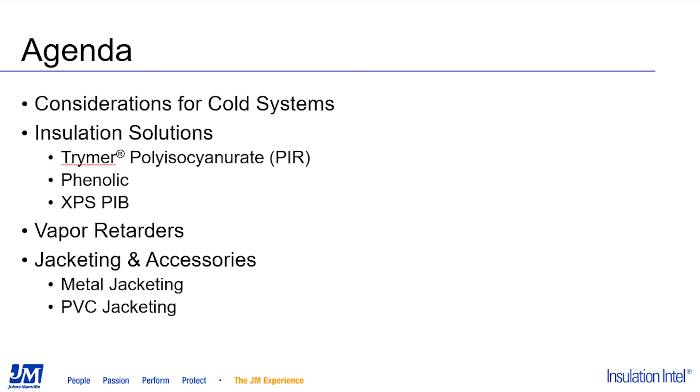Just as one example, XPS pipe insulation billet, widely known as Styrofoam, is mostly used in the application called refrigeration, which tends to be food and beverage manufacture and storage.

There are many factors which must be considered when designing a cold insulation system, and some of the key ones are shown here. There is way too much in this topic to cover in any detail today. We have presentations on this subject alone, and if this would be of interest to you, let us know and we can arrange such a presentation perhaps for your company.

The first of the design considerations we'll talk about is: what is the service temperature of the pipe or tank? Is it 40° Fahrenheit chilled water, or is it minus 320°F liquid nitrogen? The system design needs, materials, and system complexity are very different depending on this temperature.

What are the climatic conditions? That's the next consideration. Is it indoors in an air-conditioned space, which is probably the least challenging environment? Is it outdoors in a non-conditioned space, which might be a medium challenging environment? Indoors in a non-conditioned space. Is it outdoors in a humid environment, which might be the harshest or most challenging environment? Is it buried below ground? Each of these and other climatic conditions will drive different insulation system design.

The water resistance of all cold insulation systems is probably the single most important issue to consider. Using closed-cell insulations with high-quality continuous vapor retarders and jacketing that naturally sheds liquid water are among the key critical design aspects that must be considered.

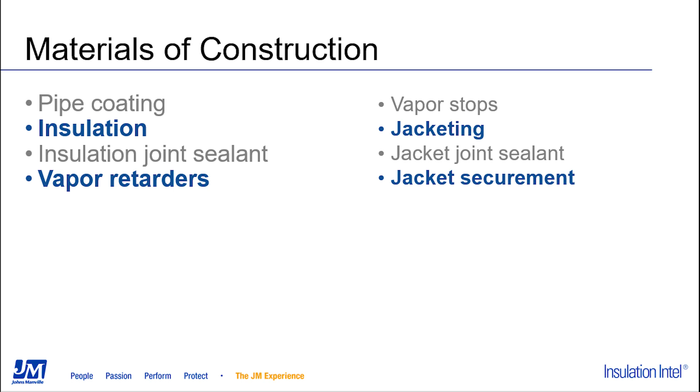Johns Manville offers materials in the 4 categories highlighted in blue here, and we will discuss each of these in more detail later in this presentation. Okay, sorry, I think we jumped here.

One of the most important aspects of cold insulation system design is the decision by the specifier on where to operate on what I call the cost-performance continuum. In general, higher insulation system cost yields better long-term performance. Conversely, a lower cost insulation system yields lower long-term performance.

However, there is no single point on this continuum that is optimum. This point differs for each specifier depending on which factors are more or less important to them.

Usually, higher performance means more redundancy in the insulation system and more backup components. An example of this redundancy would be closed-cell insulation used with a low permeance continuous vapor retarder and periodic vapor stops in the insulation system.

Redundancy also will help provide the facility owner time to recognize and find a problem with the insulation system prior to irreparable system damage. System damage is often caused by water entry. If the surface temperature is cold enough, this can form ice within the insulation system. Water or ice will hurt the insulating ability of the system and can cause physical damage, as well as possibly corrosion of the underlying pipe or tank in some cases.

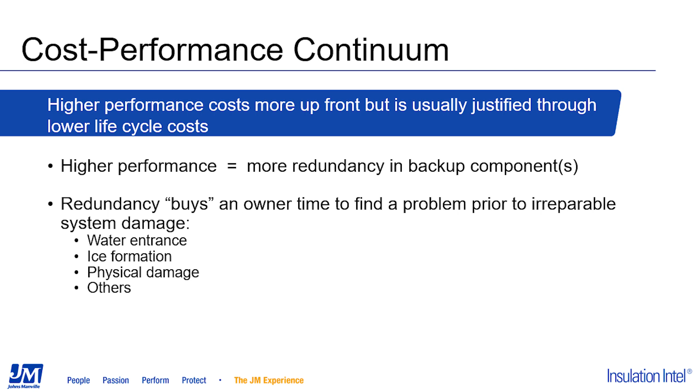Hopefully, if problems are found early, they can be repaired without having to replace the entire insulation system. This is enough discussion of design considerations for now. As you can see, it's a very complicated topic, which JM would be happy to cover with your companies separately.

A really important question to ask ourselves is, why is mechanical insulation important in cold applications? The answer is simply money.

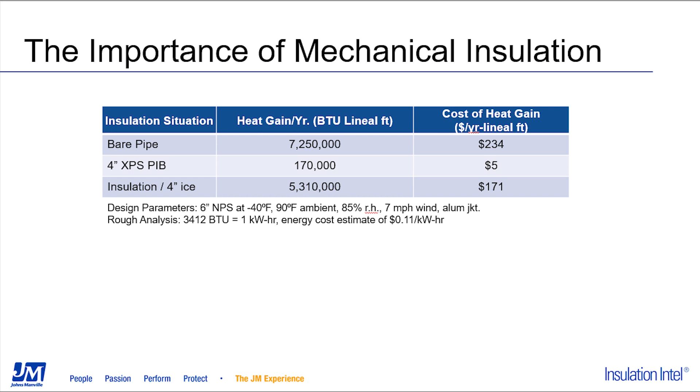As an example of this, consider the hypothetical example I've shown here. I show the cost of energy associated with a single lineal foot of pipe. Remember, this is one lineal foot of pipe for 3 different situations. These situations are bare pipe, a well-insulated pipe using our XPS pipe insulation billet insulation, and a failed insulation system.

You can see the design parameters that we have here. They're reasonable ones, and the rough analysis variables that we've chosen to use here. Again, they're all very reasonable.

The cost savings for a single lineal foot of pipe achieved by insulating a bare pipe is $229 per year, the difference between $234 for bare pipe and $5 for a well-insulated system. This is way more than the cost of an installed insulation system, and the payback for insulating this bare pipe would be just a few months at most.

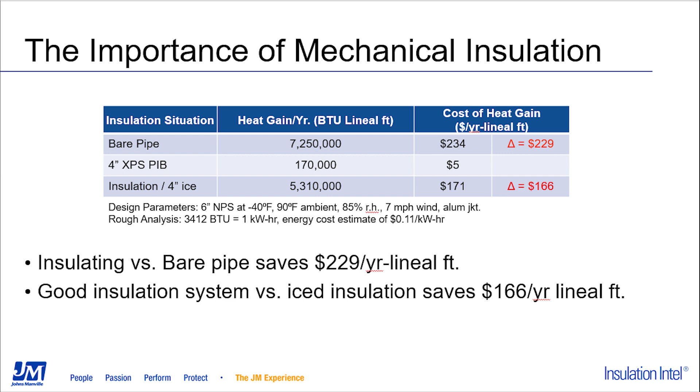Next, look at the failed insulation system, which would have an energy cost from heat gain of about $171 per year for this single lineal foot. The cost savings from a failed versus good insulation system is $166 per foot. This would also have a quick, less than 1 year payback time. Insulation is valuable and it pays for itself quickly.

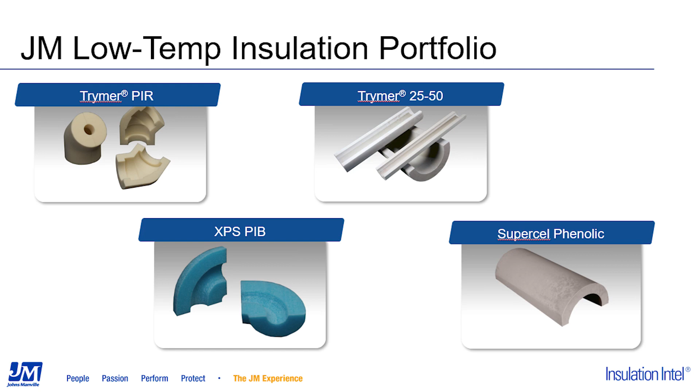The JM insulation materials that we will discuss today are Trymer PIR, Trymer 25-50 PIR, which is a special subset of our Trymer PIR insulation line, our extruded polystyrene pipe insulation billet, and our Supercel Phenolic.

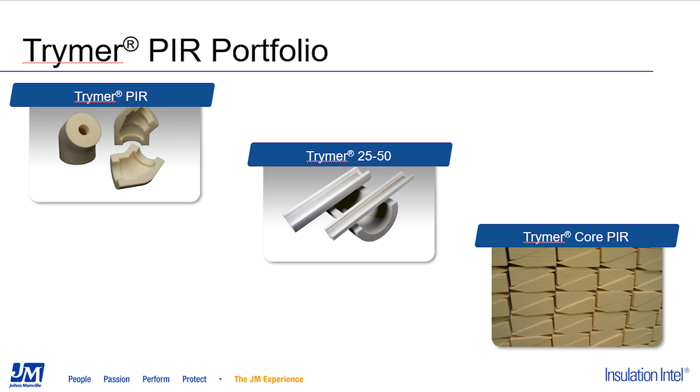The first JM cold insulation material we'll discuss is polyisocyanurate, which is such a mouthful that the industry commonly calls this PIR. The JM brand of PIR insulation is known as Trymer PIR. It comes in 3 categories: our standard Trymer PIR, also called our high index product line; our Trymer 25-50, which has superior fire resistance, we'll get into the details on that in a few minutes; and our Trymer PIR core foam, or low index line. Each of these will be discussed separately.

Our standard Trymer PIR, or high index product line, consists of 6 products with the same chemistry and composition. We purposefully control the density in this product line to achieve different strength materials. While it's primarily compressive strength that is of interest in the higher density products, all strength measurements, including tensile, shear, and flexural strength, will also increase with higher density. The product name indicates the density.

For example, Trymer 2000 is 2 pounds per cubic foot, Trymer 2500 is 2.5 pounds per cubic foot in density. This product line is primarily used as pipe, tank, and equipment insulation from cryogenic temperatures up to the 300 degree F maximum exposure temperature for all of this product line. With the exception of the highest density Trymer 6000 product, all of these have the same thermal conductivity performance with a very good value of 0.19 at the standard 75 degree F mean temperature.

As you can see, the compressive strength increases as the density is raised, and our highest density Trymer 6000 actually has higher compressive strength than standard cellular glass. All of these products are closed cell and water resistant, and all meet the flammability requirements to be considered Class A or Class 1 for pipe insulation in the building codes, which is an ASTM E84 flame spread smoke developed rating of less than or equal to 25 flame, less than or equal to 450 smoke. These materials can be used anywhere in industrial applications and even in those commercial building applications where a 25/50 rating is not required.

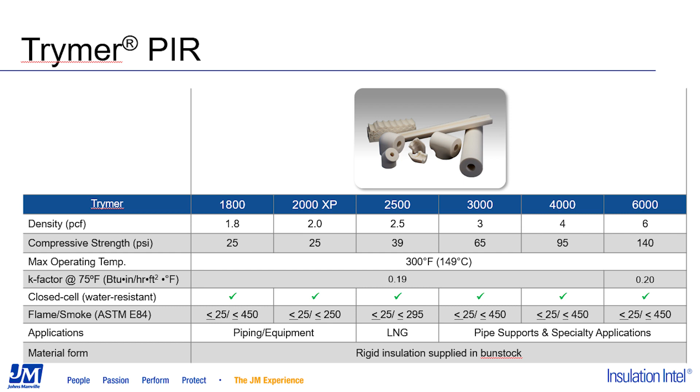Trymer 25-50 is a special product in our Trymer PIR line. It is an ideal material for use in cold and warm applications that require a flame smoke performance of less than or equal to 25/50. This includes pipe insulation in plenums, where the 25/50 or lower performance is required by codes, and in general pipe insulation used in commercial buildings, where a 25/50 performance, while not required by code, is often specified by the specifier.

Aside from this very good low flammability performance, Trymer 25-50 has the same great performance as our Trymer 2000 XP. It has an upper temperature limit of 300 F, a K factor of 0.19, and is closed cell and water resistant. The main application for this product is commercial building chilled water applications, where it provides a closed cell, water resistant insulation alternative that meets a 25/50 flame smoke rating. This 25/50 flame smoke rating for Trymer 25-50 is applicable only up to 1.5 inches of thickness, but the need for larger thicknesses than this in commercial building chilled water pipe insulation applications is very rare.

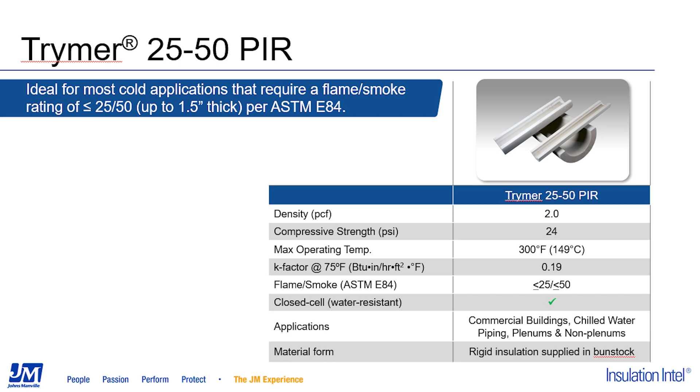The last of our Trymer PIR product lines are the core foams, or low index line. These products also come in a variety of densities and strengths, with the name still indicating the density. Each product in this line has an L at the end to indicate it's part of our low index line, so Trymer 200L, 250L, etc.

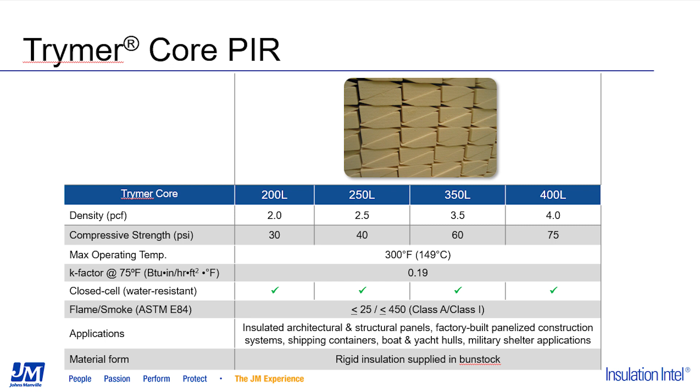All of these products have the same good low thermal conductivity of 0.19, are closed-cell and water resistant, and are supplied as large rigid buns that can be cut into whatever shapes are needed. The key application for the Trymer Core or L series products is in insulated panels, panelized construction, military shelters, and other specialty applications. This line is lower in index, which yields a material that's easier to glue strongly, adhering well to the facers, and facers are necessary for most panel applications.

Here are 3 frequently asked questions about Trymer PIR. I'll give you our answers to these.

The first: can Trymer PIR be used at temperatures below -297 F? Trymer PIR is an excellent choice for use on pipe, vessels and equipment operating at temperatures down to -460 F, absolute zero, including liquid nitrogen at -320 and other cryogenic temperatures. The JM product literature states that the lower service temperature limit for Trymer PIR is -297 F, which is the boiling point of oxygen. That's a key point: Trymer PIR pipe insulation does not have any inherent physical or thermal properties that would preclude its use below this published limit. Nothing changes in the product below -297.

This -297 limit is cited only as an attempt to caution end users that, as with all insulation types, if the service temperature will be below -297, there are important design concerns that must be considered. These center on the fact that at temperatures below -297 F, oxygen from the air can begin to condense on the cold pipe surface or in the cells of the insulation near the pipe, resulting in local regions of higher liquid oxygen concentration. Also, if the pipe subsequently warms up, there could be a thin region of air within the insulation system with higher than normal oxygen levels. Either situation poses a flammability and reactivity concern, regardless of the type of insulation, sealant, vapor retarder, or jacket used. JM has more information on this issue if you're interested—please contact us.

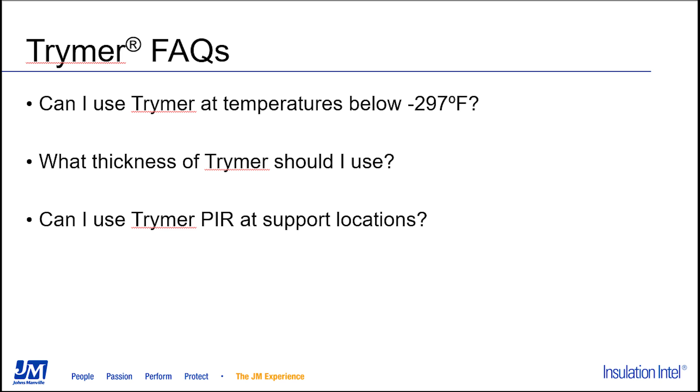The next JM cold insulation product line we will discuss is extruded polystyrene pipe insulation billet, often called XPS PIB or Styrofoam. XPS PIB is made by DuPont, but is sold, and all technical support is offered, by Johns Manville.

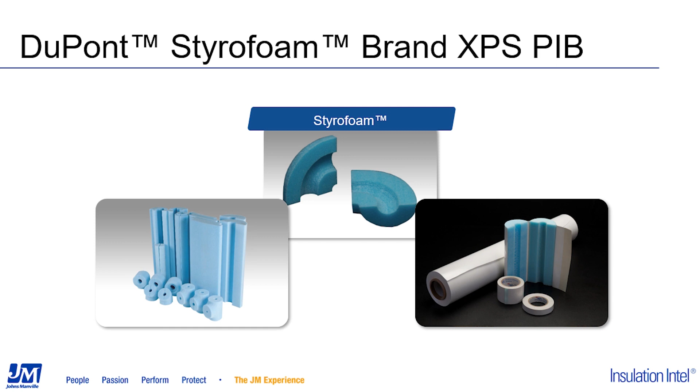XPS PIB is another great cold temperature insulation. It has a maximum use temperature of 165 F and a lower temperature limit of -320, the temperature of liquid nitrogen. It has a good thermal conductivity of 0.259, not quite as low as the Trymer PIR. It comes in only one density, which can be used at some pipe support locations, but if higher strength is needed at supports, the high density Trymer PIR should be used there, with the XPS pipe billet used in the bulk of the system on the pipe or tank.

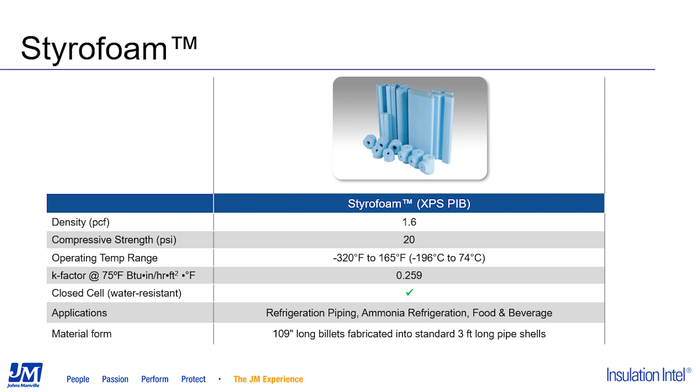XPS pipe billet is closed cell and very water resistant, even better at this property than Trymer PIR. It's used primarily in refrigeration piping, including ammonia refrigeration. The most common use is as pipe or tank insulation in food and beverage manufacture and storage. It's sold in long billets, which are fabricated into standard 3-foot-long pipe shells or other shapes. Here are 3 frequently asked questions.

About XPS pipe billet: it enjoys immense popularity in refrigeration, food, and beverage applications, but why is this? It's for two reasons. First is the old adage that nothing succeeds like success. For pipe billet, this means it has a 30-plus year history of excellent performance in this application, so there's no reason for specifiers to change.

The second reason is the underlying cause for the long history of good performance, which is that pipe billet has the properties necessary for this application. It has excellent water and water vapor resistance, good thermal performance, and is clean to cut and fabricate in the field.

The next question: can XPS pipe billet be used in heavy industrial oil, gas, or petrochem applications? The answer is no, not usually. XPS consists mostly of polystyrene foam. This polymer is soluble in most common organic solvents, including gasoline and oils. About the only common solvents that will not dissolve it are alcohols. If used in oil gas applications, leaks of commonly encountered chemicals would damage the XPS pipe billet, harming the performance of the insulation system.

Conversely, the pipe contents in the food and beverage applications where XPS pipe billet is usually used will not damage it. These include things like ammonia and common refrigerants, and of course the food and beverage that might be in the pipes as well, which would probably be water-based.

The last question: how does XPS compare to expanded polystyrene, often called EPS or beadboard? EPS beadboard is the same basic material, polystyrene, and it's the material used in white foam coffee cups and some cushion packaging. XPS pipe billet is much more water resistant than beadboard.

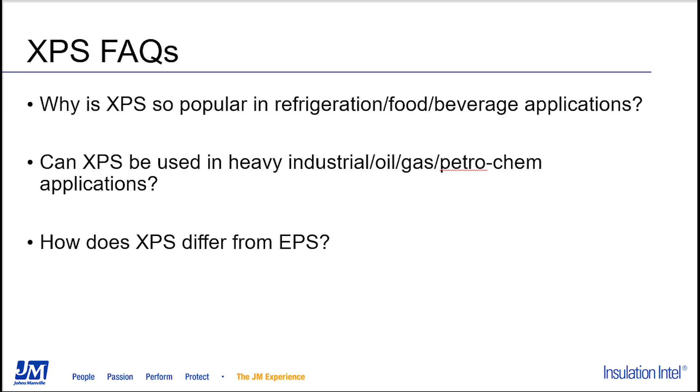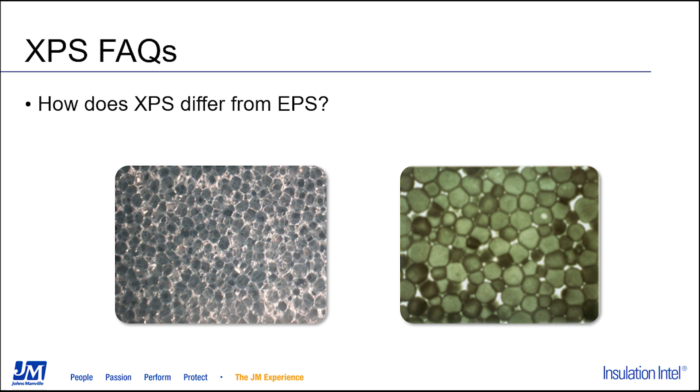JM has videos of water-based ink injection into both materials, and these clearly demonstrate the comparatively poor water resistance of beadboard, the ability of water to flow through it pretty readily. If these would be of interest to you, let us know.

The upper temperature limit is 257 F, and the same lower temperature limit previously discussed of minus 297, but really absolute zero, applies. Like Trymer PIR, Trymer Supercel Phenolic is closed cell and water resistant and has a very good low K factor of about 0.18 for the standard 2.5 pound per cubic foot product.

The higher density grades of Trymer Supercel Phenolic can be used at pipe support locations if necessary. The key benefit of Trymer Supercel Phenolic is very good low flame smoke performance. It meets a flame smoke of less than or equal to 25/50 at thicknesses of up to 3 inches.

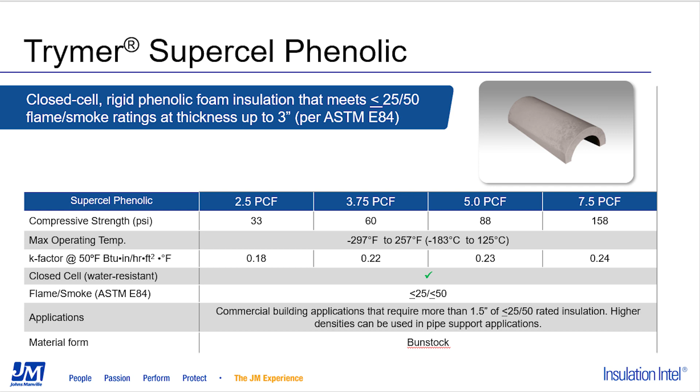So let's talk about a couple of FAQs for Trymer Supercel Phenolic. What is the benefit of Trymer Supercel over Trymer PIR? The key benefit of phenolic insulation compared to Trymer PIR is that the phenolic has lower, that is better, flammability. It meets the less than or equal to 25/50 flame smoke requirement in plenum applications at up to 3 inches thickness.

Whereas Trymer PIR only meets it at 1.5 inches thickness and less. For those very rare situations where a 25/50 flame smoke performance is required and an insulation thickness greater than 1.5 inches is also required, Trymer Supercel Phenolic would be the ideal solution.

The next question: I've heard that phenolic foam can contribute to corrosion. Is this accurate? No, it really is not accurate. In the past, there existed a category of roof insulation made from phenolic insulation.

This roof insulation was strongly linked to extensive problems with corrosion of the metal roof deck. Lots of lawsuits related to that are still making their way through courts.

Compared to the problematic phenolic roof insulation, the phenolic pipe insulation, the Trymer Supercel, that's currently being offered, including our products as well as others, uses different chemistry from the roof deck material. Our products have a much higher, that is better, pH, and it does not cause corrosion of the underlying pipe or tank. JM has extensive information on corrosion under insulation and would be happy to share this with anyone desiring more details.

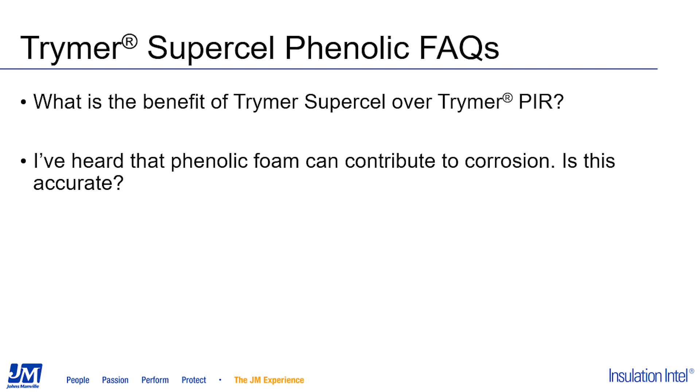Let's change tack slightly and discuss the JM vapor retarder product line used with the insulation materials we have discussed, and even with other insulations.

The JM vapor retarder line consists of Saranex CX Film and Tape. The film is available in two grades, 540CX at 4 mil thick and 560CX at 6 mil thick.

Both are clean-looking, bright white materials that are usually factory applied to the outer surface of the insulation, like many other vapor retarder types, but can also be field applied if so desired. When factory installed, they have the standard self-sealing lap tape present to seal the longitudinal joint.

Compared to 540CX, the thicker 560CX is stronger, stiffer, and more opaque, in addition to having a little bit lower permeance. Both products are available in lengthy rolls at the optimum vapor retarder width of 35.5 inches to fit on insulation pipe shells.

Both are ideal for use in all cold to cryogenic applications, where they are the key components in the insulation system that resists the entry of water and water vapor.

Both products meet the industry standard performance, which is less than or equal to 0.02 perms, and Saranex 560CX has an even lower permeance of 0.01 perms, which makes it ideal for very cold and cryogenic applications, say anything below 0 degrees F. Saranex CX tapes are based on the Saranex CX films and have the same excellent low permeance.

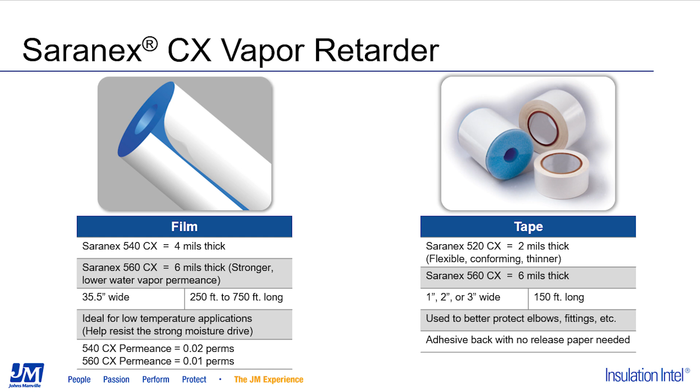The CX tapes have an adhesive applied to the back side which does not require the presence of release paper, making it a little easier to install and handle than many other vapor retarder tapes which come with release paper.

Here are some of the key benefits and reasons to use Saranex CX Film. Both types of film surpass the most stringent industry standards for permeance of vapor retarders used on cold pipe and tank applications. The film is strong and resilient with great puncture, abrasion, and tear resistance.

Both films have excellent low flame smoke performance. Both easily meet a less than or equal to 25/50 rating. The films offer great installation flexibility.

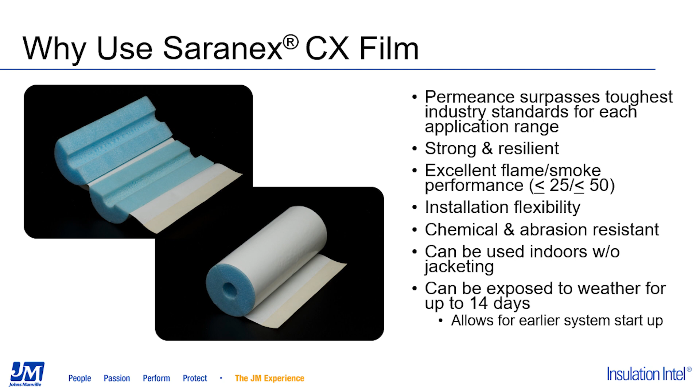They can be field or factory applied. They have great chemical resistance and abrasion resistance. The films can be used without jacketing indoors, where it closely matches the color and appearance of white PVC jacketing. It can be exposed to weather outdoors for up to about 14 days, which can allow earlier system startup.

And here are some reasons to use and key benefits of the CX tape. The tapes have the same great low permeance as the base films. They provide excellent adhesion. They're flexible and conforming for spiral wrapping around fittings and elbows.

They do not have release paper, which makes them easier to install and handle than vapor retarder types that do have release paper. The tapes can be used to patch holes in the Saranex CX Film vapor retarder. And the CX tapes are easy to install, which reduces installation costs.

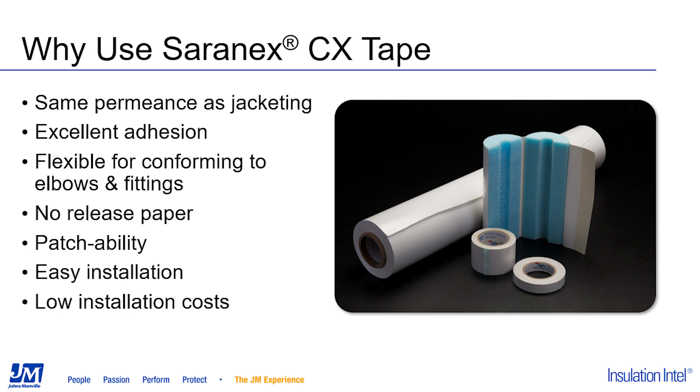Thank you very much, Jim, and thanks for that excellent overview of our foam insulation and vapor retarder products. As Jim just said, I will now take us through a discussion on JM's metal and PVC jacketing solutions.

As many of you know, metal jacketing is one of the primary components used in an insulation system to provide protection to the underlying insulation. Insulations used in most industrial applications require some type of external protective layer to provide abuse resistance, protecting the system from damage due to mechanical impact, like people walking on pipes or things getting dropped on it, as well as providing weather protection to the underlying insulation and pipe or equipment, keeping water out of the system and protecting it from potential long-term UV exposure, which will degrade most insulation materials.

In addition, your metal jacketing system is your first line of defense to provide protection against corrosion under insulation. It is the first element used for keeping water out of your insulation system, which is crucial for the successful operation of most insulation systems.

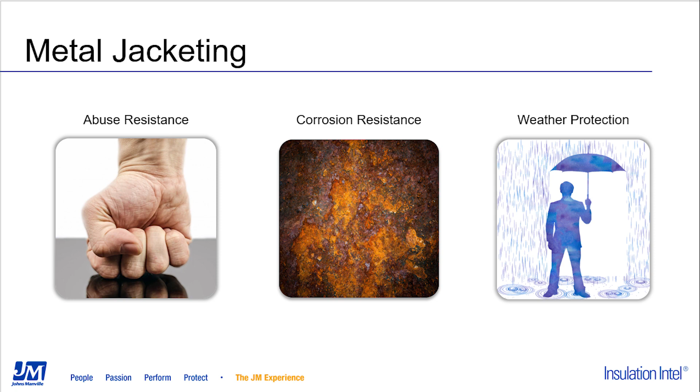There are a lot of complex aspects in terms of how metal jacketing is installed on pipes, tanks, and equipment, and we're not going to go into detail today on installation techniques and methods, but if you do have installation questions, please feel free to contact us. We also have a very thorough line of installation guides available on our website for you to download and use as necessary. The specific categories of metal jacketing products we're going to cover today are our roll jacketing, sheet jacketing, and our two-piece pressed elbows.

We also have a line of metal jacketing accessories, including banding, seals for securing the banding, screws and springs, but due to time constraints, we're not going to get into a detailed discussion on those today. If you do have questions, please feel free to reach out and ask, and we'll share more information with you.

We're also not going to go into detail on this, but all of our metal jacketing products do meet the applicable ASTM standard requirements for metal jacketing, which are C1729 for aluminum and C1767 for stainless steel, as well as meeting applicable metal alloy standards such as B209 for aluminum.

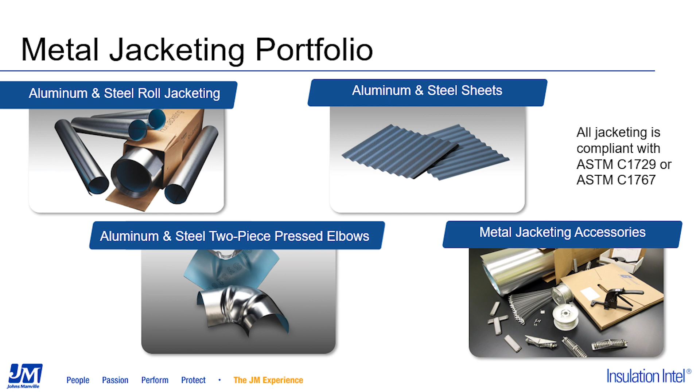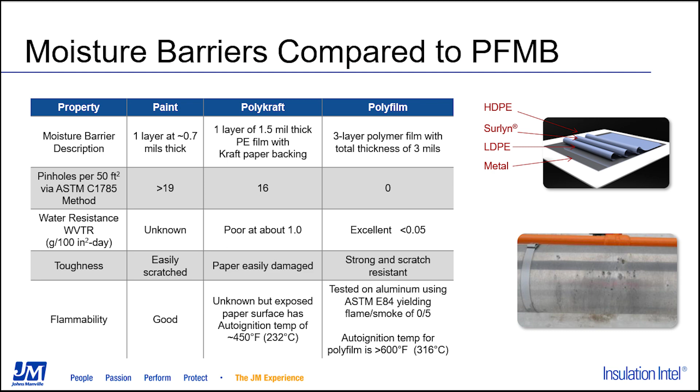It's also important to know that polyfilm is not a proprietary product, and it is available as an inner coating from most manufacturers of metal jacketing material. We highly recommend that all metal jacketing systems be specified to use a polyfilm moisture barrier.

We have aluminum with a bare exterior, our standard aluminum product, which provides good corrosion resistance due to the natural corrosion resistive nature of aluminum. We also have a line of aluminum with a painted exterior, which offers a slightly improved level of corrosion resistance, as well as a different aesthetic appearance, which might be desirable in some applications.

Lastly, we have two grades of stainless steel, T304 and T316, which provide superior and excellent corrosion resistance respectively. Stainless steel jacketing is typically specified when the requirement includes the need for fire resistance or fire protection. Aluminum typically won't provide the level of protection needed in a fire situation, whereas stainless steel will.

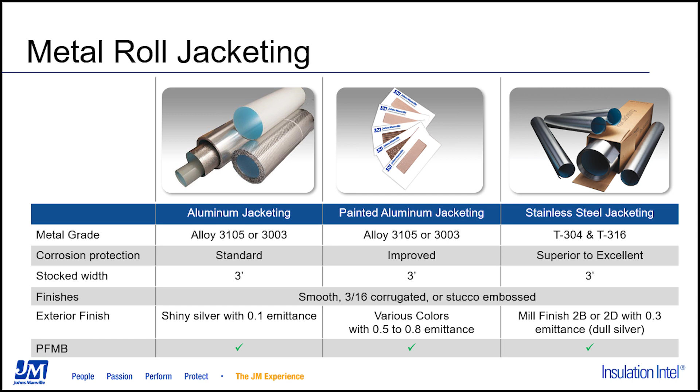JM also offers all of our roll jacketing products with a polyfilm moisture barrier on the interior surface to help protect the jacket from corrosion from the inside out.

The next product in our metal jacketing line is our acoustical metal jacket, called Muffl-Jac. This product is also sold in rolls. It is a slightly thicker, 0.020-inch aluminum jacket that's laminated to a 1-pound mass-loaded vinyl layer.

This added mass provides a higher mass outer layer to your insulation system, which can help absorb, dampen, and block the transmission of sound emanating from the insulated pipes, tanks, or equipment. So it can be an important element of your insulation system where acoustic control is important.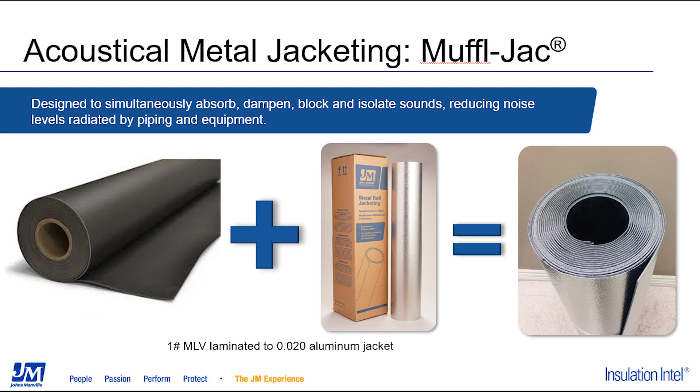The next product in our line is our cut and roll metal jacketing, which comes in the same metal alloys, exterior surfaces, and finishes as our roll jacketing. This product line is identical to the metal roll jacketing, except that it is pre-cut in our factory to fit around insulation of a specified size.

We have pre-cut configurations to match the circumference of the required insulation system being insulated, and it does include a standard 2-inch overlap at the longitudinal joint, and as an option can include a 1/2-inch safety hem.

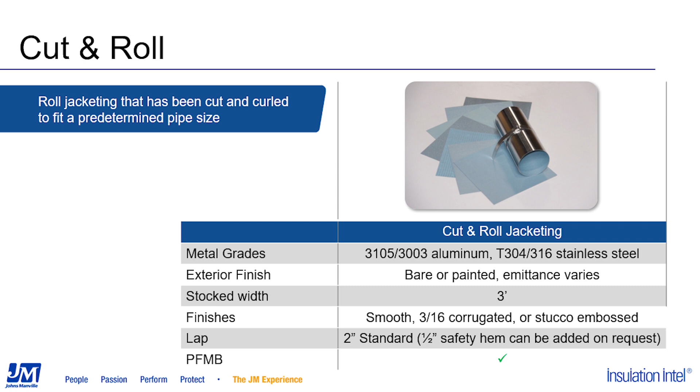The next product in our portfolio of metal jacketing is our deep corrugated sheets. These again are our standard metal jacketing that's cut to length and has a sine wave pattern pressed into it, as you can see in the two graphic images on the right-hand portion of the slide.

These are available in either aluminum or T304 stainless. The exterior surface or finish is unpainted, so it has the natural emittance of the metal used, which is 0.1 for aluminum or 0.3 for stainless steel.

The interior surface does have the Polyfilm moisture barrier on it. These products are typically stocked in a standard width of 33 inches and standard lengths of 8, 10, and 12 feet, and the metal finish can be smooth or stucco embossed. We offer 2 corrugation patterns, as shown in the chart, a 1 1/4 by 1/4 inch and a 2 1/2 by 5/8 inch.

Deep corrugated sheet is often used on vertical vessels larger than 8 feet in diameter or other large tanks and equipment. It should never be used on horizontal vessels because the lower portion of the corrugations will collect water, which can lead to corrosion over time, as well as create an opportunity for water to enter the jacketing system through the overlapping joints and adjacent pieces and panels.

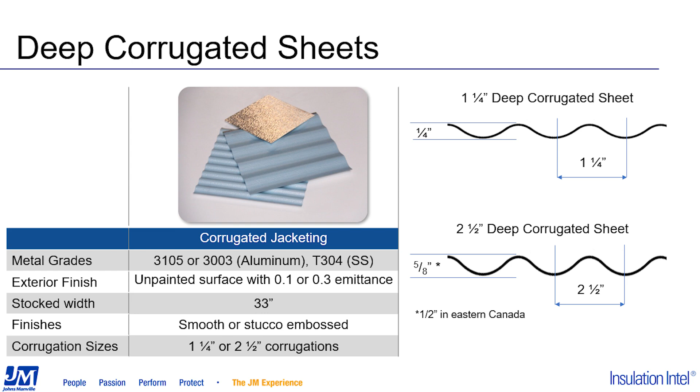Our next product is the box rib sheets, again fabricated from our standard metal jacketing cut to length, but these have a square wave pattern pressed into them as opposed to the sine wave pattern. They're available primarily in aluminum, specifically the Alclad alloy, which offers very good corrosion resistance.

A T304 stainless steel option is available, but we rarely see that utilized. The exterior surface is unpainted, so it has the emittance of the natural metal alloy, which is 0.1 for aluminum. Typically stocked in 2 standard widths of 27 1/2 or 38 1/2 inches, and the same standard sheet lengths of 8, 10, and 12 feet. The metal finish is stucco embossed, and the rib pattern is as shown in the graphic image, a 4-inch pitch with a 1-inch depth to the corrugations.

The purpose of the box ribs is to provide added structural strength or support to the jacketing system. Box rib sheet is most commonly used on power plant breechings, large vertical vessels, or other large pieces of equipment, and again should never be used in a horizontal application or orientation, as it will also collect water in the box rib corrugations, which can lead to corrosion or entry of water into the insulation system.

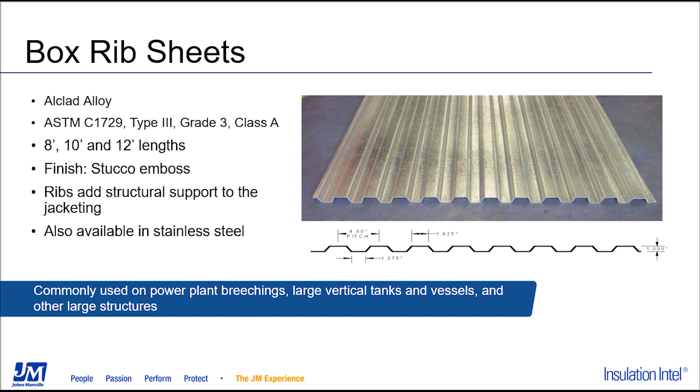Stepping into the next line of products within our metal jacketing portfolio, we'll take a look at our 2-piece elbows. These are an excellent alternative to miter or gore fabricated elbows. We offer these in both aluminum or Type 316 stainless steel in multiple sizes and shapes to fit various pipe sizes and insulation thicknesses. We have 2-piece metals for both 45 and 90-degree elbows, as well as short and long radius. And we have a complete line of elbows we call multi-fit that we'll talk about in more detail later, designed to fit multiple sizes rather than an individual size.

2-piece metal jacketing elbows offer quite a number of advantages over miter or gore elbows. They offer much faster installation and can typically be installed by a less skilled labor force, both of which provide significant cost savings. They can shorten a project timeline, and everyone knows that with a lot of industrial projects, with insulation being one of the last pieces of work to be completed, and the project already over budget and behind schedule, it's very important to facility owners to try and get it done as quickly as they can.

A very valuable benefit: 2-piece elbows have fewer joints and much shorter total joint length, therefore reducing the opportunity for water to get into the insulation system and degrade its performance. They also provide what many people believe to be a superior aesthetic or cosmetic look. Lastly, mitered elbows have a tendency to gap at the joints, as seen on the left, as a result of natural expansion and contraction of the insulated pipe system, whereas the 2-piece elbows do not have that problem. You can see a good picture at the top right of the slide showing a nicely installed 2-piece elbow with a very clean finished appearance.

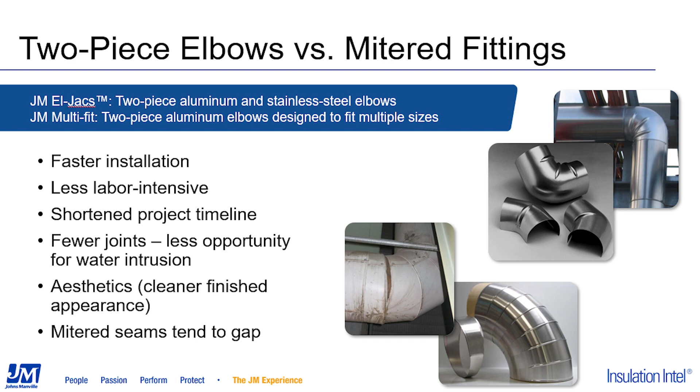Within our elbow family, we have a line of two-piece elbows made out of standard aluminum called Ell-Jacs Plus. These are an 1100 alloy aluminum two-piece elbow lined with the Polyfilm moisture barrier. Johns Manville is the only jacketing company that offers two-piece elbows already with a Polyfilm moisture barrier installed on the inside of the elbow.

These provide an extra level of protection with the Polyfilm moisture barrier to reduce the likelihood of jacket corrosion on the interior surface, which can definitely be an issue at the bottom of vertical pipe runs where water might have a tendency to collect. Elbows from other jacketing manufacturers and suppliers typically only have a painted moisture barrier, which does not offer an equivalent level of protection against corrosion compared to the Polyfilm moisture barrier.

The Polyfilm moisture barrier on the Ell-Jacs Plus line is the same as that on our roll jacketing or the cut and roll products, so you get the same performance through the entire jacketing system. They're fully compliant with all relevant ASTM standards and made to fit pipe elbows from 1/2 inch up to 12 inch. They're also designed with increased spacing between the ribs and fingers to make it easier to install the banding for cold applications.

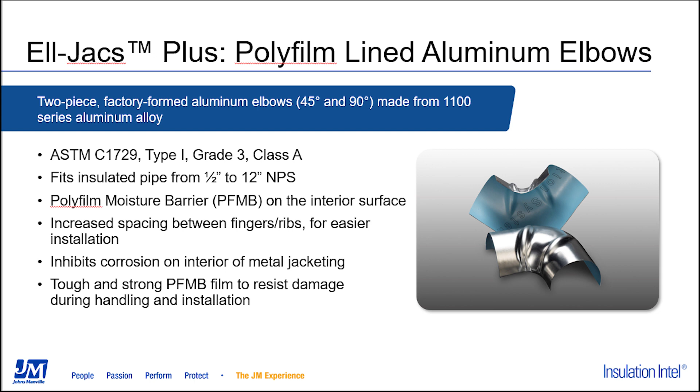Let's take a look at a few questions that we very frequently get asked with regard to our metal jacketing line. The first is why should I use stainless steel over aluminum? There are several different reasons why that might be the best choice to make.

The first is corrosion resistance of the jacketing itself. Stainless steel T304 is going to be more corrosion resistant than bare aluminum, and T316 is going to be more corrosion resistant than T304. 316 is commonly used in offshore applications where you have constant exposure to salt water and a salt atmosphere, where corrosion can be a significant problem.

Another reason for selecting stainless steel over aluminum is fire resistance, which I mentioned earlier. The melting point of stainless steel is about 2,500 degrees, whereas aluminum is 1,200. In rare cases where an insulation system is intended to help provide fire protection to pipe, tank, or equipment from fire, aluminum will not provide adequate protection and stainless steel must be used.

The last consideration is physical strength. Strength of stainless steel is much higher than aluminum, but this can also be mitigated by thickness. Thicker aluminum obviously provides more protection than thinner aluminum, and stainless steel will typically provide better protection than aluminum.

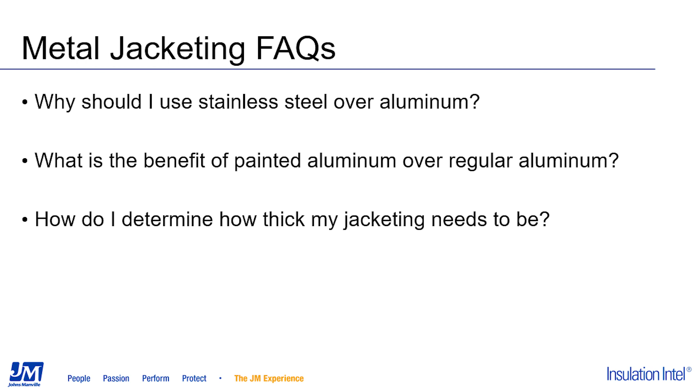Next, we'll branch and take a quick look at our PVC jacketing line. Once again, PVC jacketing is utilized to provide protection to the underlying insulation system against possible mechanical damage from impact or other potential damage risks, and can also be used to provide color identification, which is very frequent in certain industrial applications, especially utility rooms, chilled water systems, and things of that nature. You can use the color to readily identify what is contained within the piping system.

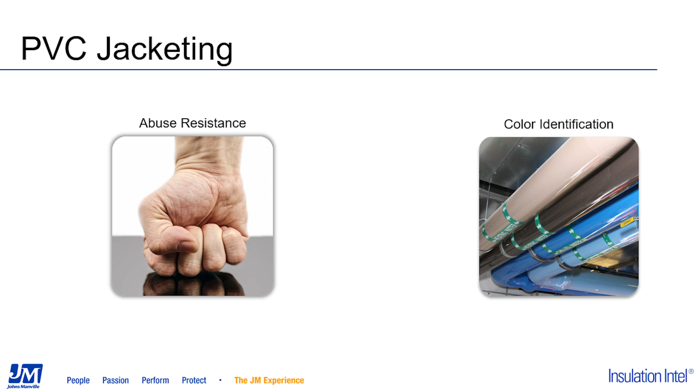Our PVC product line is called Zeston, and we have several products within the Zeston product line: the Zeston 2000, which is a series of molded fittings, as well as our Zeston 300, similarly a line of molded fittings. The last product in the Zeston line is our cut and curl jacketing.

All three are available in 14 different colors. The difference between the Zeston 2000 and 300 fittings is the thickness or mil rating, with the 2000 being a 20 mil product and the 300 being a 30 mil. The cut and curl jacketing is available in both thickness options, 20 or 30 mil.

All are rated for an operating temperature range of 0 to 150 degrees Fahrenheit, but you have to remember this is typically being installed over your insulation system, so it can be applicable to systems operating at higher temperatures than that. There aren't a lot of different section sizes available for the fittings.

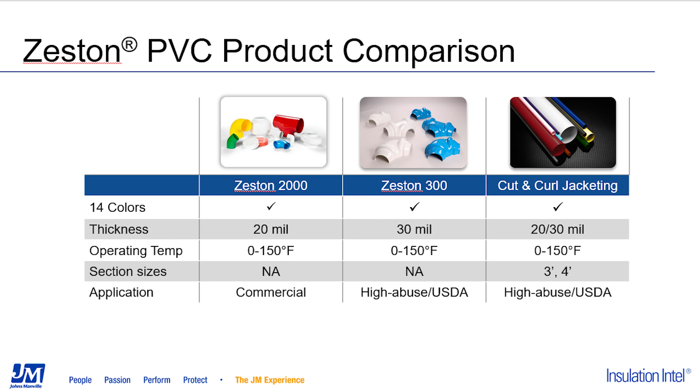The standard lengths of the cut and curl are 3 foot and 4 foot. The applications for this are typically commercial for the thinner grade Zeston 2000s, high abuse applications, or USDA specific applications for the higher thickness Zeston 300s, again high abuse or USDA for the cut and curl products.

Some quick FAQs for the PVC product line or Zeston fittings. How do I determine the right size for my application? The proper size for Zeston cut and curl jacketing and fittings depends on both the pipe size as well as the insulation thickness, so it's the outside circumference or diameter of your full insulation system.